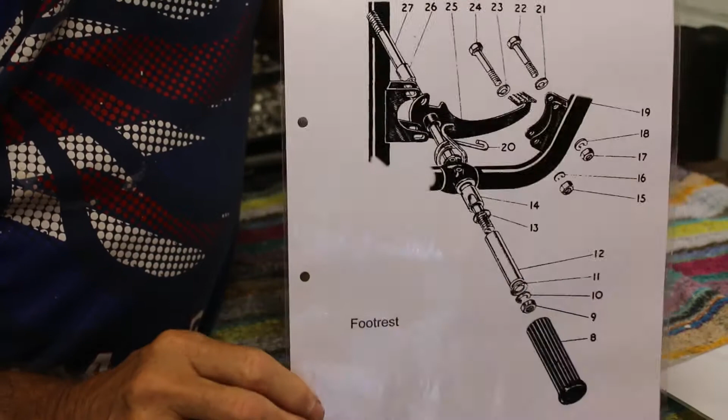Today I'm going to be working on the centre stand and the footrest, and I've been working from good old plans that I had made, which you would think is relatively simple.

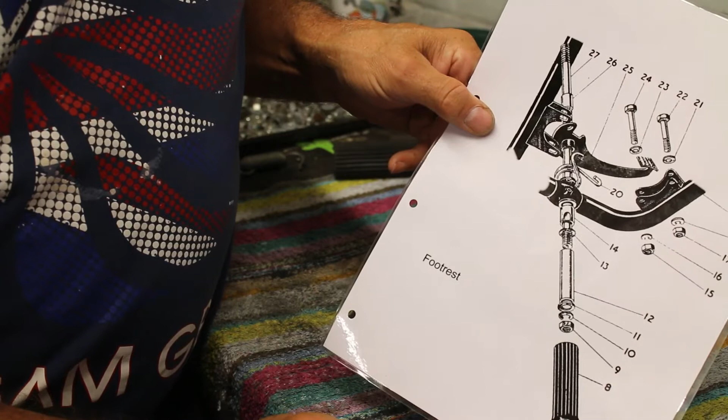The footrest consists of a bar that goes all the way through both sides, and the rubber footrests themselves screw onto it, and everything else swivels on that.

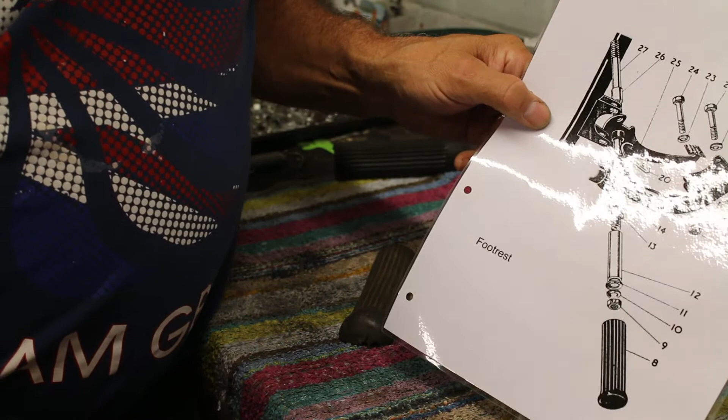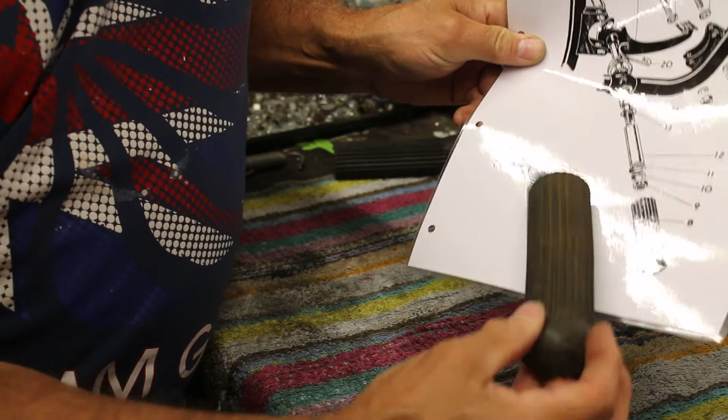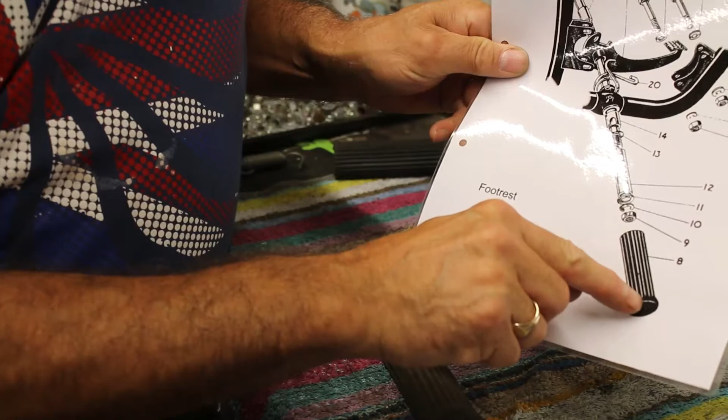One of the problems I had before was when you twist the rubber footrest in, the nut is right up on the end, and as you rotate the footrest, the nut turns and goes down the thread all the way. But if you turn it too far, the threaded bar starts to protrude out through the edge of the rubber, splitting it.

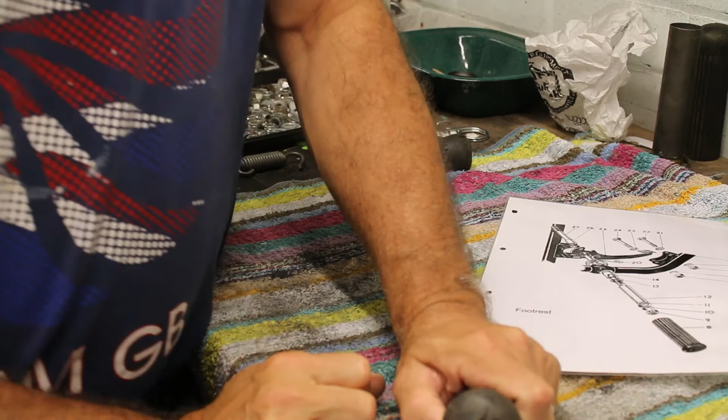I don't know if the camera can see, but it splits it because you've turned it too far. I'm thinking, I wonder how many people have had a problem with that.

So what I did is I bought some new rubbers, completely empty, just ready to be refitted. And I thought to myself, I wonder. So I cut a footrest in half to see what's inside.

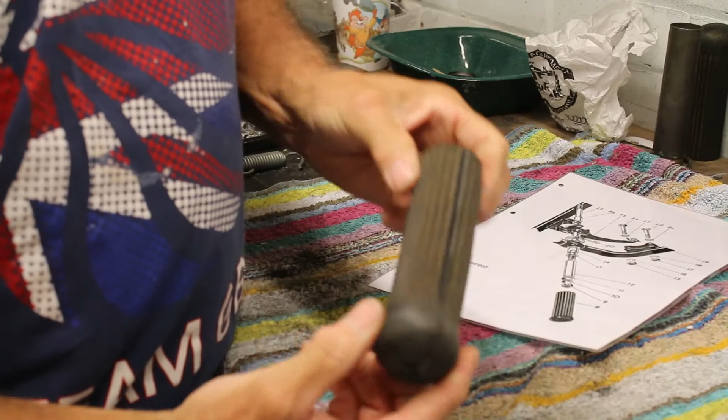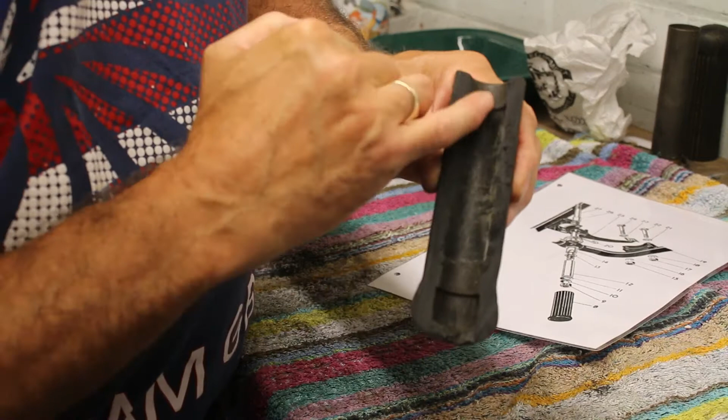And what's inside is an indentation with two little bits of moulding in there. When you look inside, you get the nut and two spacer bars.

So as you screw in, the spacer bars would provide support to the actual footrest. The bar would go all the way through into that nut, and that's it.

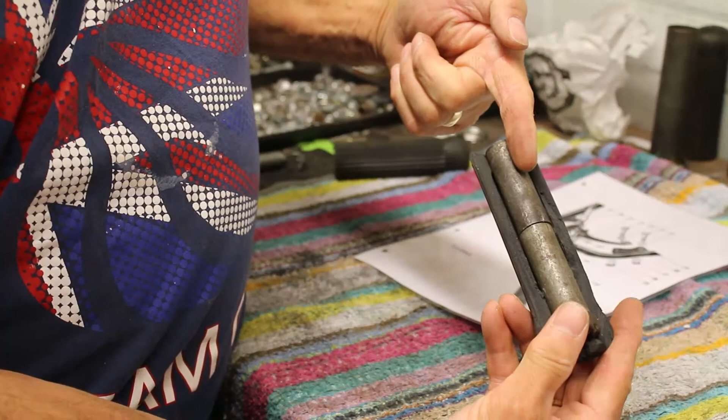But what happens is, as you tighten up the footrest, the bar goes through, and I'm thinking, well, that can't be right, can it? What do you do, just twist it up until it's about right and leave it alone? It's the footrest, it's where your feet go.

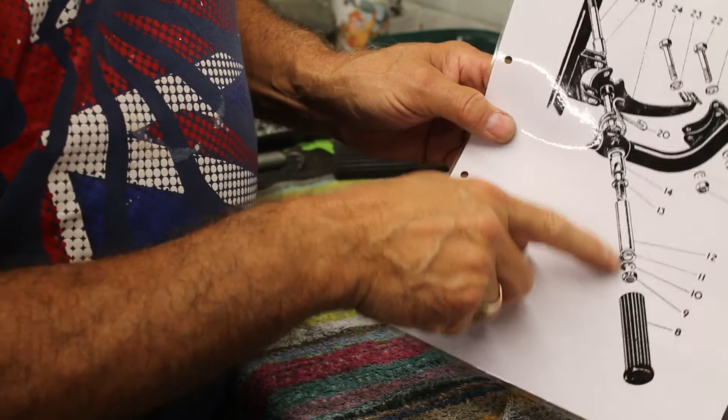So I'm thinking, right, there's got to be another solution to this. What would happen if that's the nut there - oh, you can't see it, so I'll bring it up so you can see. Can you see both? So that nut there is that nut. There's the spacer, two bits and pieces.

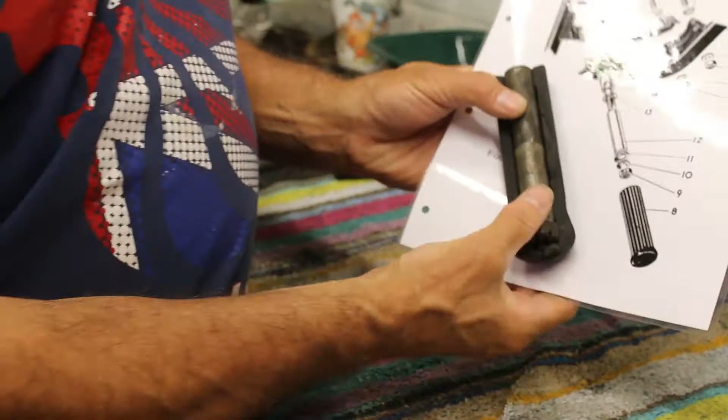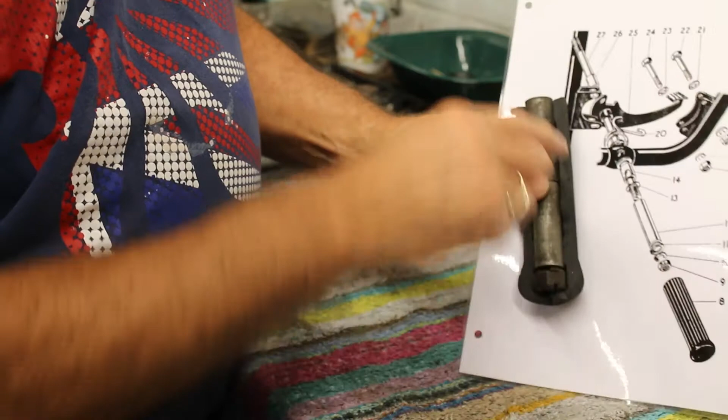The spring washers there - I suppose if you want to be 100% accurate, you could do it that way. And then that protrudes out onto that. But then it still doesn't stop it - if you turn too hard, it still protrudes out through the rubbers.

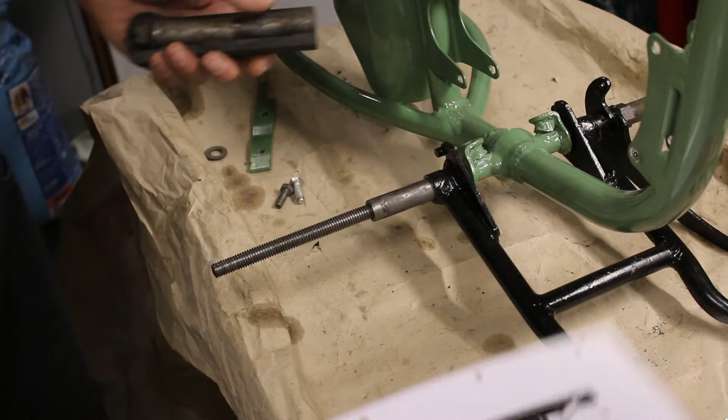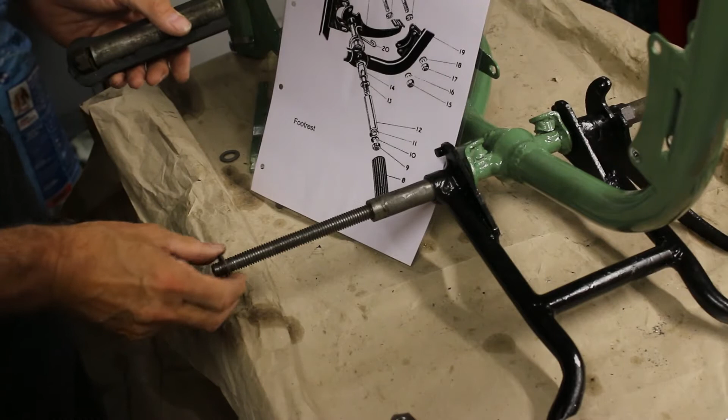I'll show you what I mean over here. So if you're looking at the diagram in relation to it, there on the diagram is the spacer bar. There's the washer, and then...

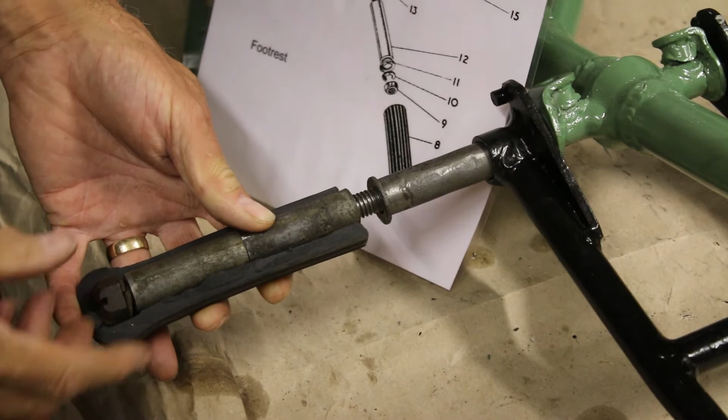There is the footrest - I don't know if it can zoom in a little bit, see if we can zoom it in just a little bit more. And then the nut is on the end.

And I'm thinking to myself, crikey, you can see that as you would tighten this up by twisting it round with the nut encased in the rubber, everything would move along, move along, move along.

And then what would happen is, if you tightened it up too hard, this screw thread would then start to protrude through the rubber, and that's if you didn't get the distances right. So you could easily ruin a rubber by doing it.

So I'm thinking, right, well, there seems to be a fair bit of gap there for the nut to go through. So if I just now remove the rubber and take a new nut and tighten the nut on, so it looks like that - the same thing is going to happen, in relation.

There's all that space there in which to nip it up, and I'm thinking, this can't possibly be right. It doesn't give you any leeway at all to do anything. So I'm thinking, right, hang on then, what else could we do?

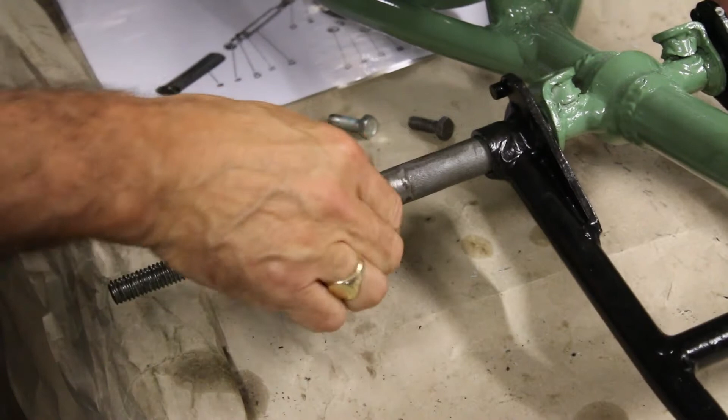I've taken that nut down, and as you can see now, the stand, because it's on that spacer bar, stands free, brake bar free, but it's a lot more solid. I haven't nipped it up fully, it's just to show you what I mean, because I'm going to do all the bits and pieces in a bit later on.

But if I tightened it up, then that would be nice and solid and not able to move. So then if you look at the inside spacers, 1, 2, there's a bit more, the nut protrudes over.

So if one puts the nut on, feel how much more solid that is. Then no matter how much I tighten this up and that rubber, it's going to hold there. It's not going to go at all.

And what I forgot to do is put the spring washer on to make sure the nut doesn't come undone.

So for demonstration purposes, there you go. So now when you tighten that up, let's say that's as tight as I can twiddle it, the threaded bar does not protrude through the edge of the rubber, and the footrest is solid.

The stand still moves, the brake pedal still moves. Oh, you can't see that off camera. Let's just move it around a bit. So the stand still moves, the brake pedal still moves up and down, but the footrest is a lot more solid, albeit it's not all nipped up.

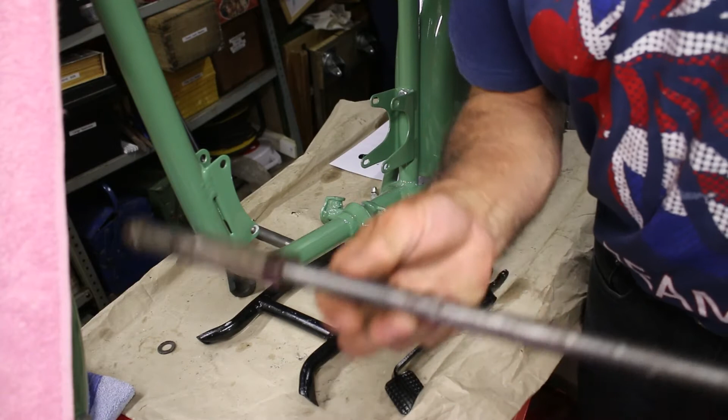Okay, so I was talking earlier about my invention, and as you can see, what we were talking about is the end nut, then the spring washer, and then the two spacer bars like that, and that stops it from going forward.

But all I did was extend the threads just down a bit on each side all the way down, so that's the central core. Don't know if the camera can pick it up, but you can see I just brought the threads down that way. And the only thread cutter I had was a half inch British Standard Whitworth, so that's what I used.

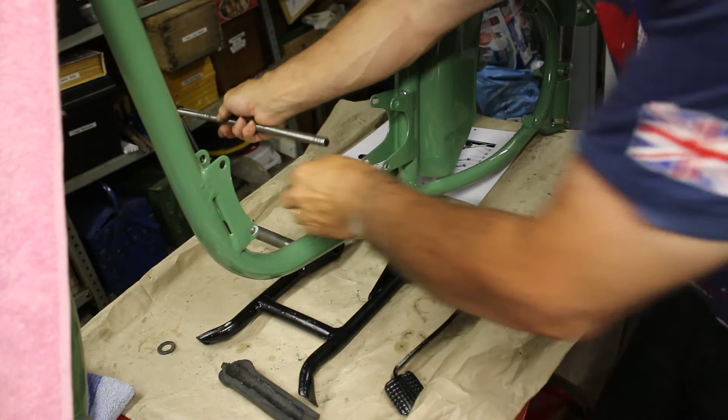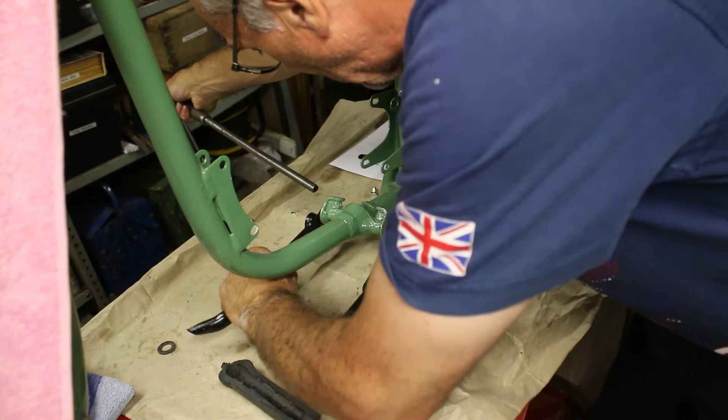And I had 4 new nuts and I've just put it on. And how it goes together is the spacer bar goes on first in relation to it, on there, and then it passes through, and it passes through there.

Spacer bar on this side goes through the bracket, through the centre stand, push a bit further. The brake pedal goes over the spacer bar until it all presses home, like that.

And then the nut goes on the other side, just like we did on the other one. And brings it all the way home. I'll just stop the film here because this is definitely a bit boring.

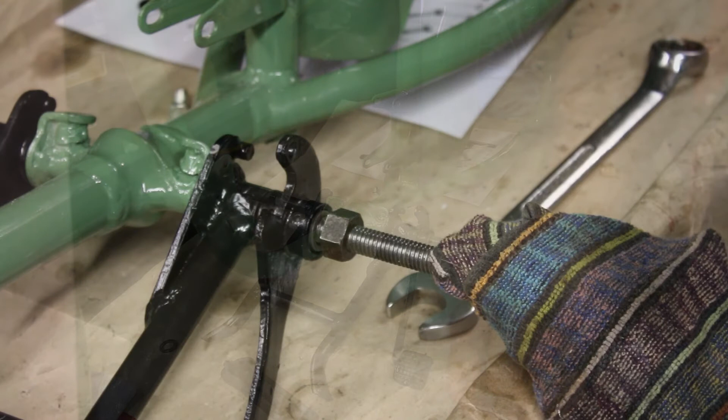In case you're wondering what happens if you turn the nut all the way too tight, won't it grab that? Well, in actual fact you can see that the spacer bar just sticks out about 1 or 2 mil.

So when you tighten everything up, it grips it nicely, and I'm just going to nip it for now. Brake pedal's moving, and it's just nipped up on that spacer bar.

I don't want the bike to fall on me. As you can see, look at that. So that's it. That moves like that and that moves like that.

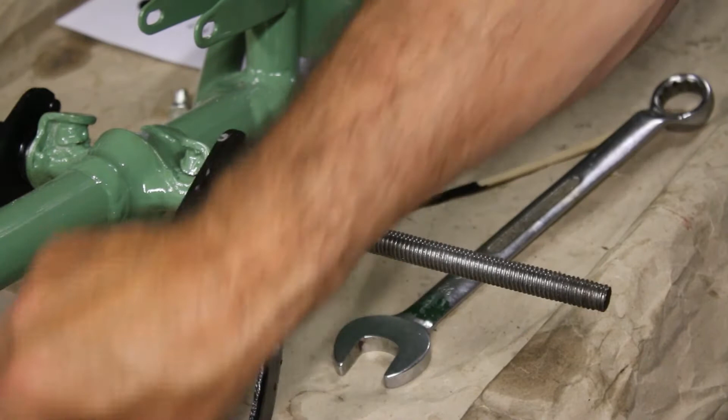So we've got to make sure that we get the spacer bars in, the thread, the spring washer, and then the nut on the end to do it. And I'm just going to nip it up so it doesn't move when we do it.

So I've got myself a dead weight hammer, a hot air gun just in case it gets stuck so that I can keep the rubber hot and malleable as it moves, and I can't pick the rubber up because I can't pick the jam jar up. It's got hot water on it, so I don't know if this is going to work, but I can only try. Let's have a go.

Hey, look at that. Perfect. So we'll go and do the other side. I'm really impressed.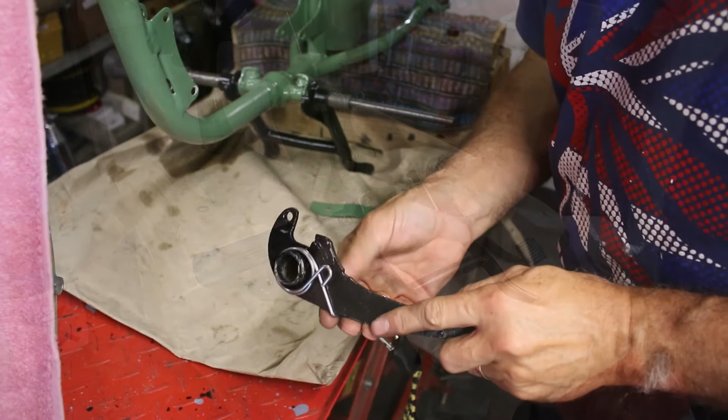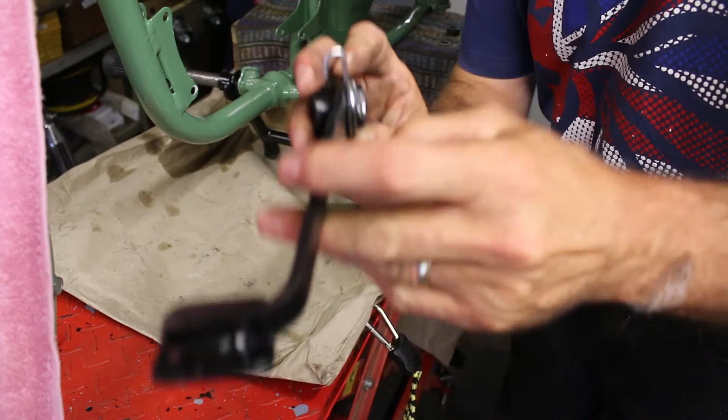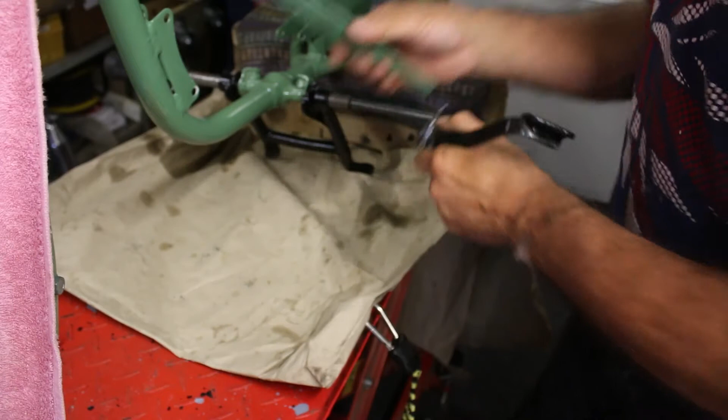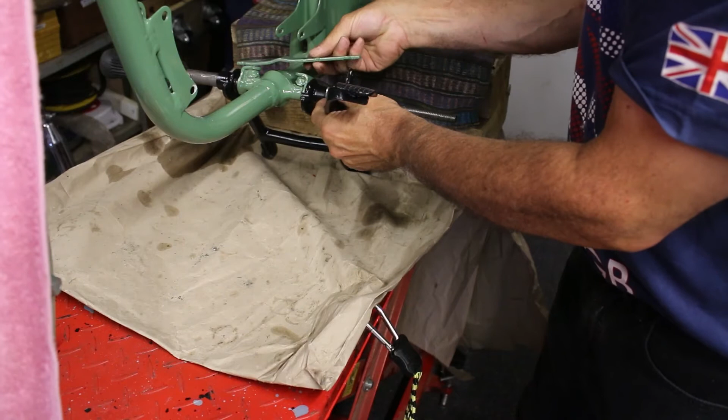So now we're going to be fitting the brake pedal and the return spring. The return spring is quite awkward looking really. What happens is the return spring goes over and then it catches - I don't know if the camera can see it - it catches there, leaving a little bracket piece. That bracket piece eventually has to fit on there, and the whole lot has to go on there, sort of like that. Then the bracket piece will come on and do it.

Now, some of you may have noticed that since I was doing the last bit, I've had to raise the bike up on some blocks of wood to enable me to get in and get this sorted. So I'm just going to pause the camera while I tighten everything up again, because I wanted to show you how the spring went on the brake pedal itself. I'll pause the camera while I do the nut up.

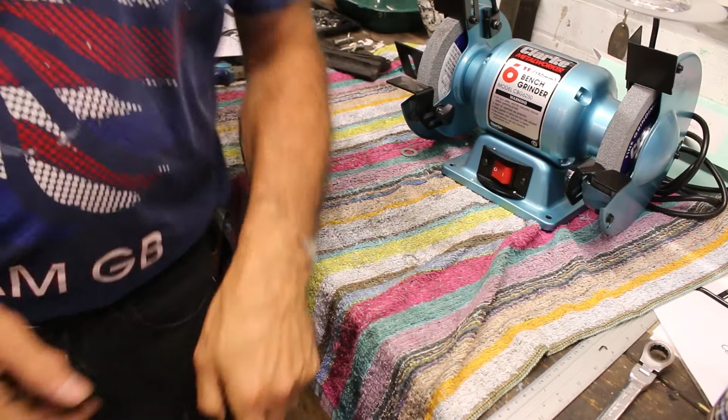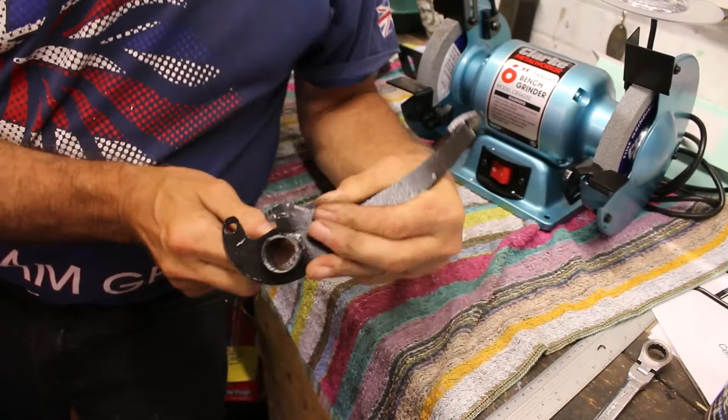Despite the best intentions, when I started to fit the spring onto the brake pedal and had a look, when I was nipping things up tightly, I thought there was just a gap of about 1mm - it was because the spindle wasn't square, and that caused a problem. So what I now need to do is, when I tighten the nut up, it gripped the pedal and the pedal was not moving very well. It was free, but it really should be quite slack.

So what I'm going to have to do is make a spacer bar to fit inside there, but also be able to pass the middle of the spindle down through the middle. As I don't have a lathe or anything, what I've got is a bench grinder, so I'm going to have a go at just grinding the edges off this little washer, and that should give me the distances I need to be able to nip up without causing any issues.

So I'm going to have a go and see how it works. You never know. Bit of a blow really, that. But I suppose if BSA had done it, they would have done it easier, rather than having somebody make it up - that's probably why they didn't do it. But I'm going to persevere and see how it goes, because we're only talking maybe a millimetre or so, and hopefully that'll be able to do it.

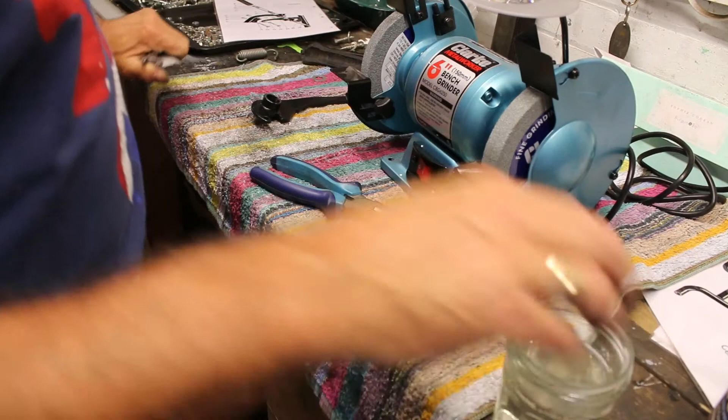So I've got my trusty bench grinder here, got my pliers. I know there's probably millions of things that you shouldn't do. And I'm going to recycle my water, cool it all down, and I'm going to have a go.

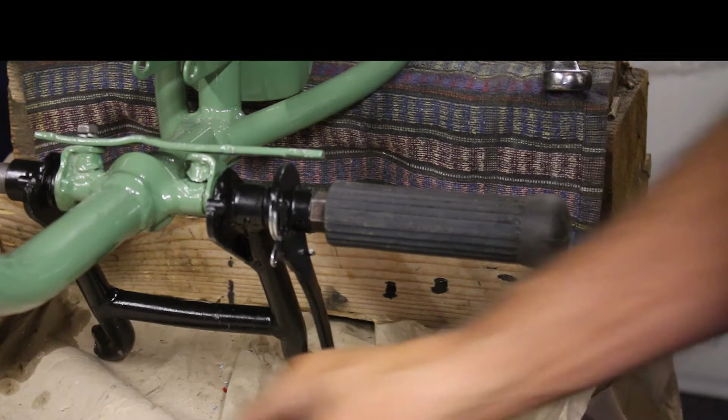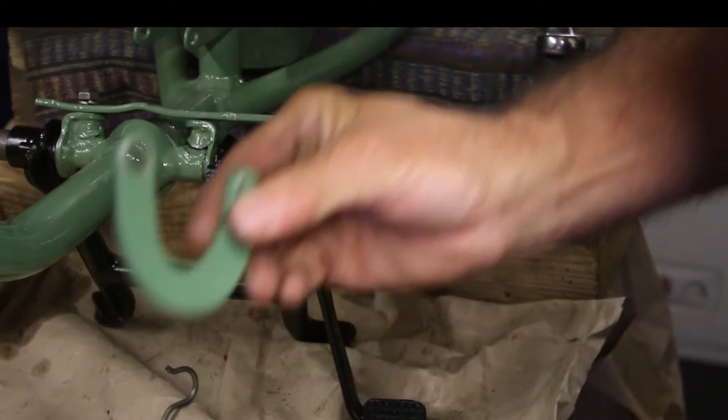Okay, so there's a bracket that goes on the top like so, and then that goes underneath, and then there's a spring that goes from the bottom there onto the stand to keep the stand away. I'm blocking the view out with my fingers.

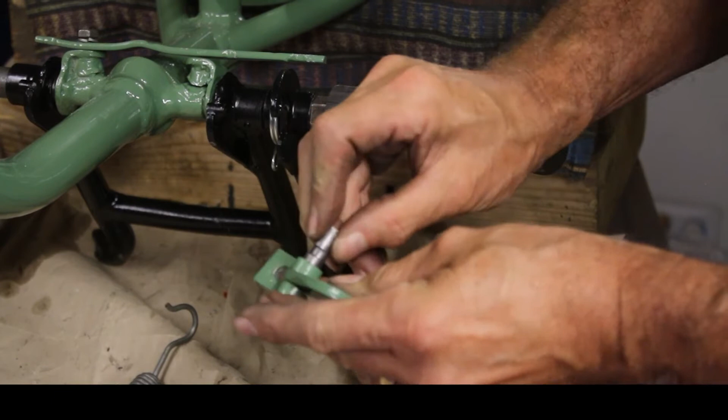And the bracket is held in place by a very little clevis pin. You know, these are 25 quid on eBay, blimey. But this is the original one, and they're held in place by 2 split pins. Now it's false economy, isn't it, to not put on new split pins. So I'm just going to open them up so they don't fall off, but I'm not going to do everything until I've got it all in situation, bolted up and in the right place.

So that goes on through, snipping it up, because I forgot to take that off. It's got to go like that. Let's get that.

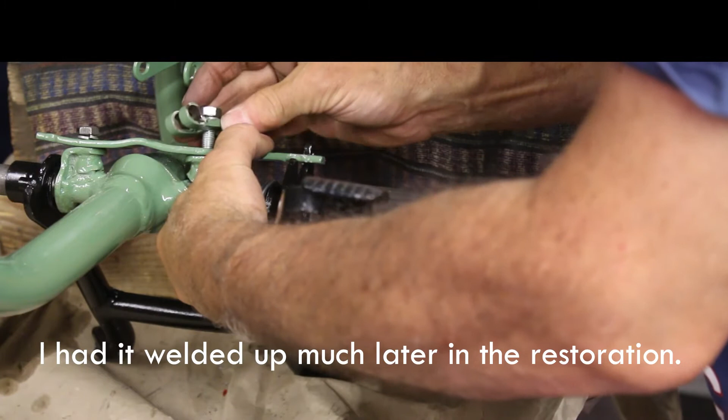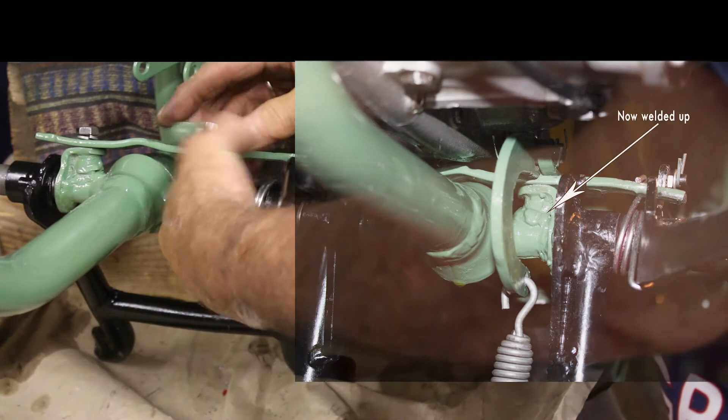Not in square. For some reason the nut... see, good reason I didn't use a split pin screw. I'm going to take this off. That nut's not square, that bolt isn't square. I don't want to cross thread anything. That's better.

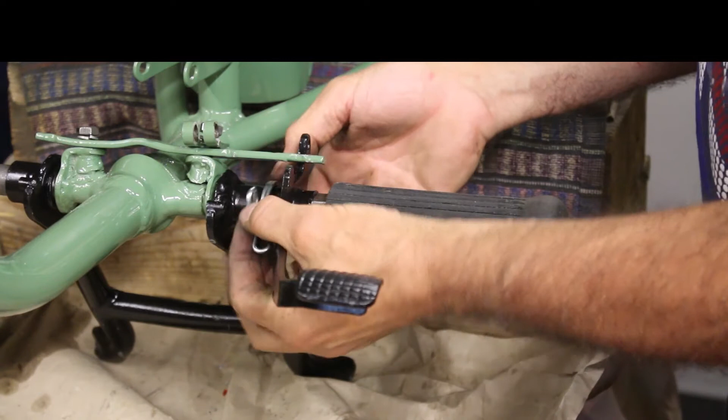So I've still got this blinking spring to get right round there, and I'm not too sure how to do it easily. There must be an easy way, but when you look on YouTube, nobody's actually shown you doing this, so there must be a really easy way of doing it. I don't know which to do first, the spring on there.

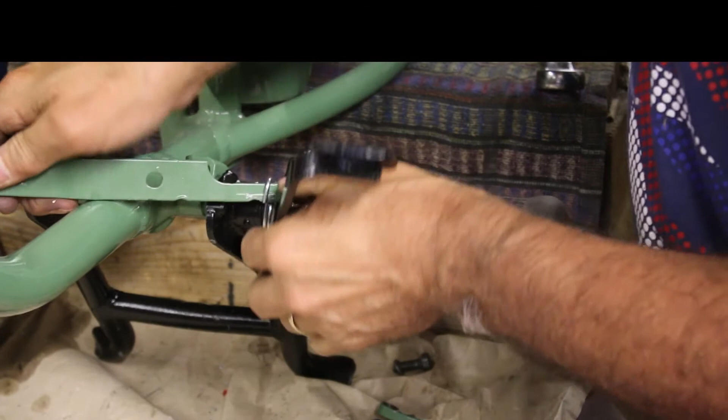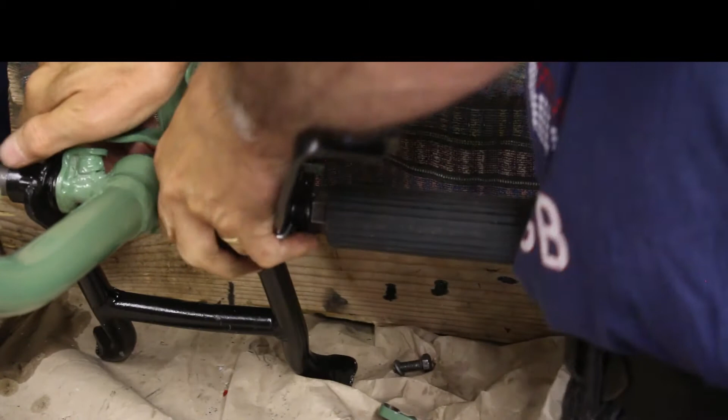Ouch. So that looked about right, but it doesn't feel right. Let's just try that. Oh, hold it there.

Hey, look, it's working. Well, I never would have believed that. So, centre stand in, put it through. I'll tell you what, let's put some copper slip on that. Or, not copper slip, some red rubber grease, because after all, it's going to be at the bottom of the bike, where all the muck and dirt's going to go, so let's get it in there.

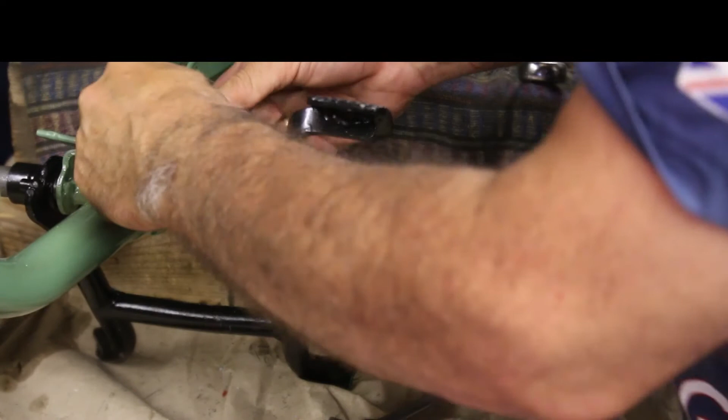Just looking to see... yeah, well, looking at it, can't go any other way. Through? Yeah, coming. Gosh, we're going cold. Right, I'm doing it now. Yeah. That was my wife telling me that my dinner's ready. So I'm just going to knit this up.

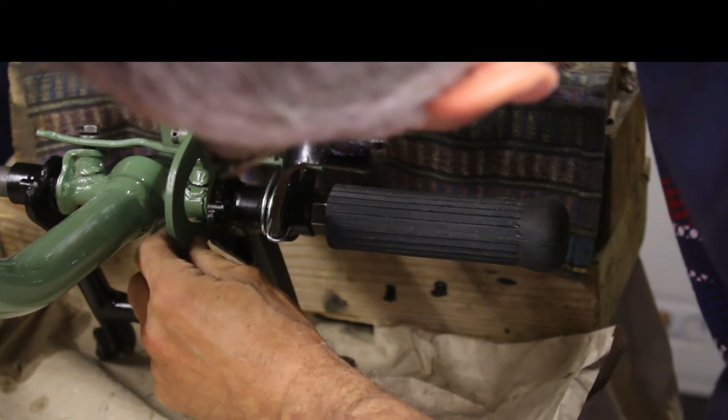I'm going to pause it there while I go have something to eat and have a ponder.

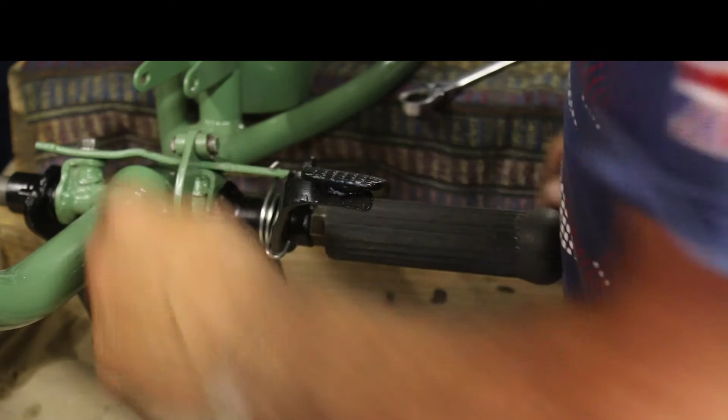So I'm back putting this centre spring thing on. Where we left it before was I couldn't get it, it was catching for some reason. So I went away and thought about it. And then what I did is I just took the paint off that was on the inside, just there, and behold, it works. Can't see it, can you? Behold, it works. And it literally was just the paint that was causing the bother. So once again, I'll just take this off.

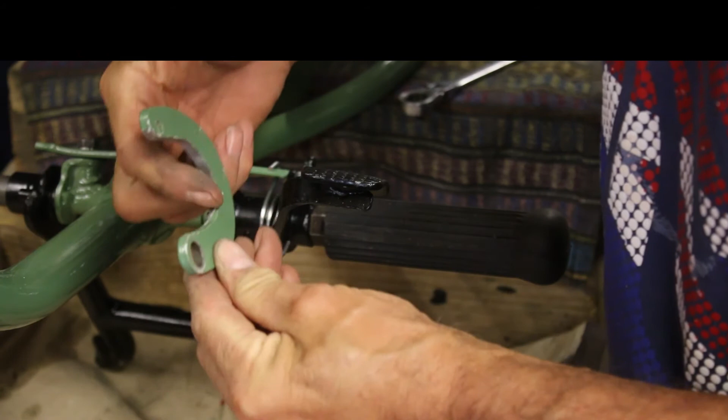Don't know if I can show you there, look, just taking the paint off the edge, just on the inside edge, just there, and it works great. So I'm just going to put some red grease again on this because it's worn off on the last one. I do like this red rubber grease. It does seem to keep everything lubricated okay.

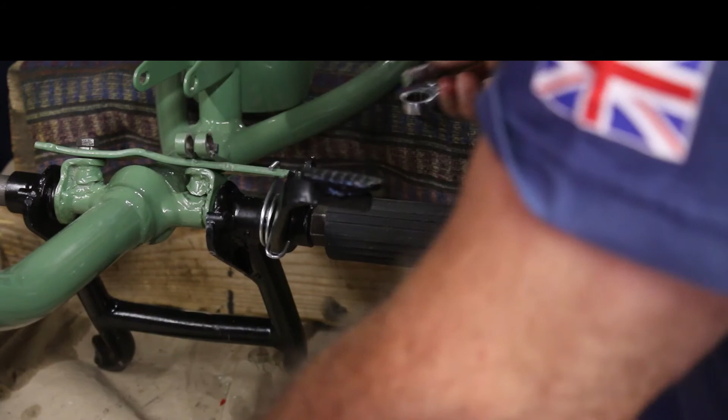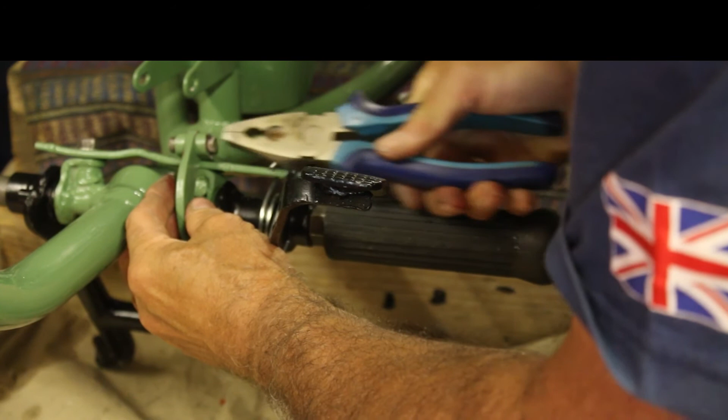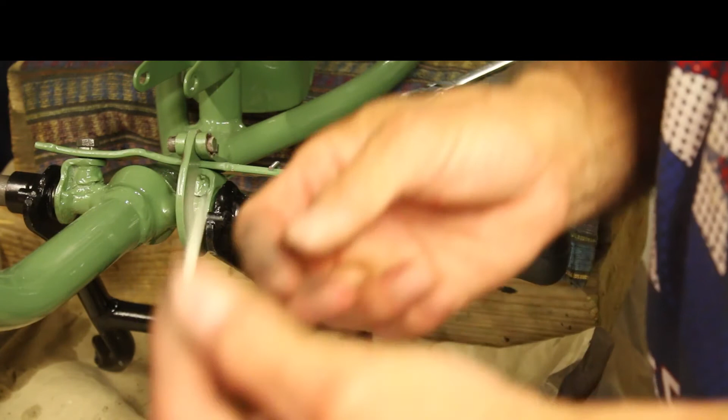Whoops. We spoke earlier about the split pins. I'm just going to put the new split pins back in. There's one, and there's the other one. Just put them around so we know that they're nice and new and safe.

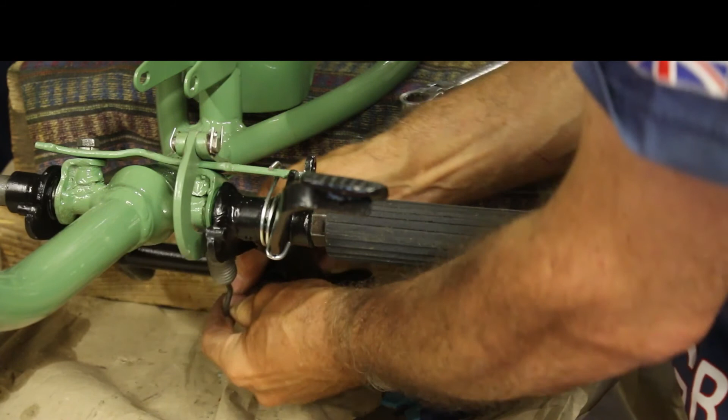Brake's working, stand's working, bracket's working. Just got the awful spring to put on now. It's always one thing after another, isn't it, really? I've just got to pull that down and put that on, and I'm just a bit nervous about doing it with it being on its stand, but no. See if we can get it on. Almost was on before.

Would you believe it? There you go. And it's working. We have a lot of ground clearance, but I think what might be wrong is the spring might be wrong, because I read online that somebody had pointed out the spring was the wrong type of spring. Not one size fits all, as they say. But for now, that'll do for me until I check out what the ground clearance is and see how we go.